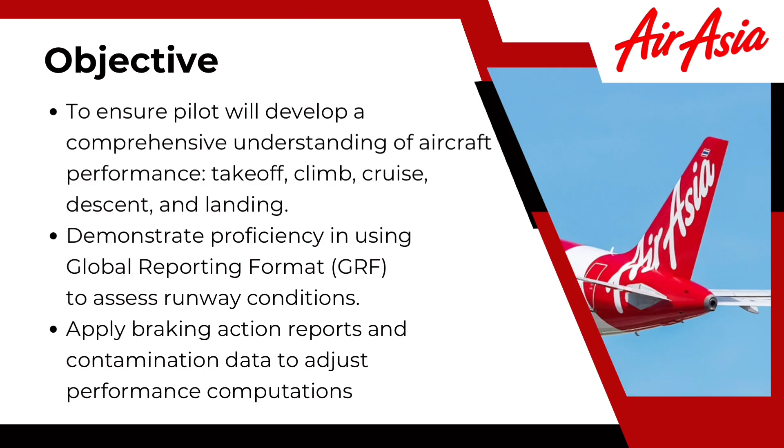Objective: to ensure the pilot develops a comprehensive understanding of aircraft performance - takeoff, climb, cruise, descent, and landing. Demonstrate proficiency in using the global reporting format to assess runway conditions, and apply braking action reports and contamination data to adjust performance computations.

Definition and purpose. Per Airbus, Getting to Grips with Aircraft Performance, Chapter 1: performance is the capability of an aircraft to safely achieve specific flight phases under defined conditions, meeting CS-25 and FAR-25 requirements. It is measured, demonstrated in flight tests, and recorded in the AFM.

Purpose in airline operations, per FCOM Intro: ensure safe operation within certified limits, optimize payload, range, and fuel efficiency, and provide accurate data for dispatch and in-flight decision-making.

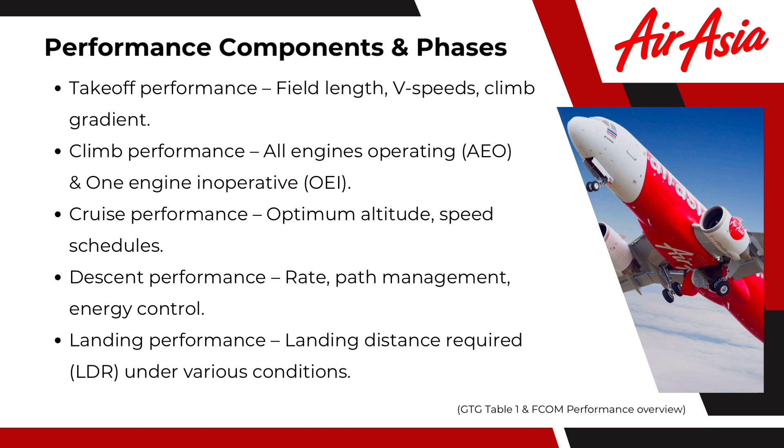Performance components and phases: takeoff performance covers field length, V-speeds, and climb gradient. Climb performance includes all engines operating (AEO) and one engine inoperative (OEI). Cruise performance covers optimum altitude and speed schedules. Descent performance involves rate, path management, and energy control. Landing performance covers landing distance required (LDR) under various conditions.

Factors affecting takeoff performance: aircraft weight. Increased takeoff or landing weight means longer field lengths and reduced climb gradient. Center of gravity also matters - a forward CG increases drag, while an aft CG reduces stability.

Environmental conditions: wind - headwind improves performance, tailwind degrades it. Temperature - high OAT reduces thrust and lift. Pressure altitude - high altitude reduces air density.

Regulatory framework, from Getting to Grips with Aircraft Performance, Chapter 3. The hierarchy: ICAO SARPS, Annex 6 and 14, set global standards. EASA/FAA provide certification and operational rules. CS-25/FAR-25 provide detailed performance requirements - certification versus operational.

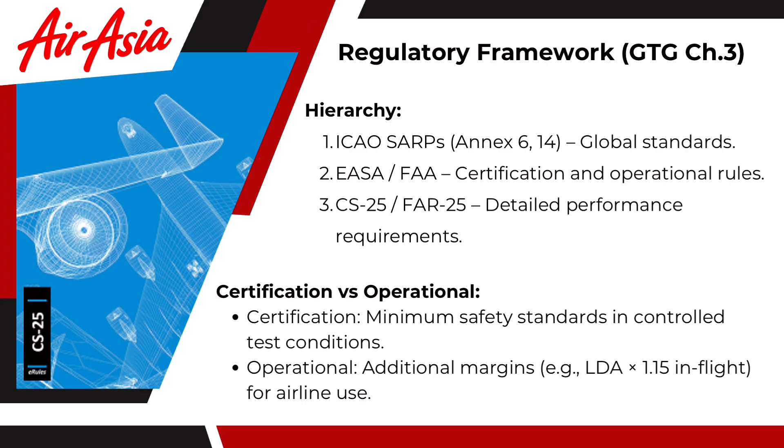Certification establishes minimum safety standards under controlled test conditions. Operational rules add additional margins - for example, LDA times 1.15 in flight for airline use. CS-25 versus FAR-25 share a common structure of limitations.

Takeoff performance requirements include climb gradient requirements for AEO and OEI, and en route OEI drift down. For landing performance, differences between standards are minor wording or procedural differences.

Airbus data meets both standards. Per Airbus documentation flow, GTG Chapter 4 and FCOM Intro: the AFM, Aircraft Flight Manual, is legally binding and contains certified data and limitations.

The FCOM, Flight Crew Operating Manual, is based on AFM data but adapted for operational use. It contains performance tables, QRH cross-references, and MEL/CDL adjustments.

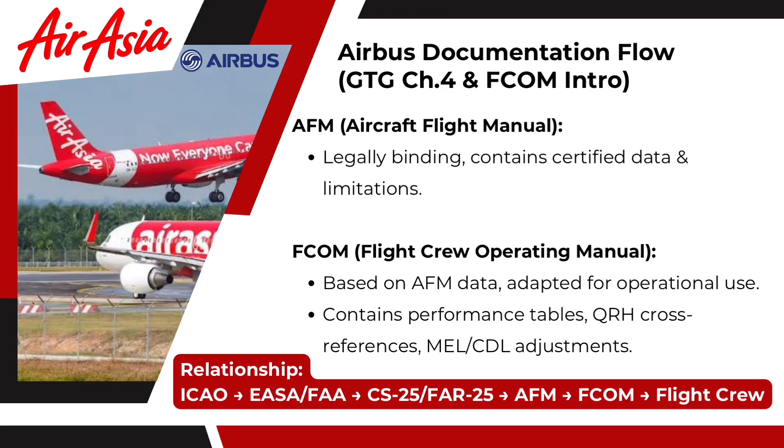The relationship flows: ICAO, through EASA, through FAA, through CS-25, through the AFM, through the FCOM, through to the flight crew.

Summary and key takeaways: performance knowledge is essential for safe, efficient, and compliant operations. Always consider weight, CG, and environment in performance calculations. The regulatory chain ensures data integrity from ICAO standards to cockpit tables. The AFM is the certified truth; the FCOM is the operational application. This foundation applies to all subsequent topics: takeoff, climb, cruise, descent, and landing.

Takeoff performance: scope and objectives. Purpose is to ensure safe airborne transition and required climb gradient compliance under given conditions. Regulatory basis: CS-25, FAR-25, covering accelerate-stop, accelerate-go, and obstacle clearance requirements.

Performance data sources: the AFM provides certified data, while the FCOM provides operational application for pilots. Flight phases covered include ground roll, rotation, liftoff, and climb segments.

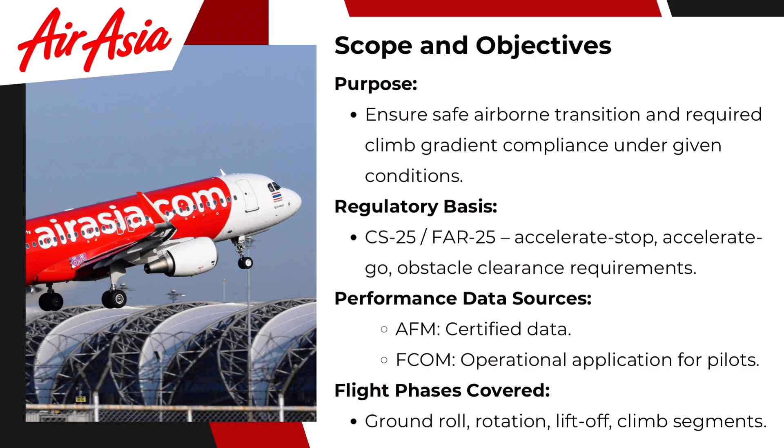Regulatory requirements: certification standards for takeoff. CS-25/FAR-25 key points include balanced field length determination, OEI climb gradient minima, and V-speed definitions and criteria, demonstrated with worn brakes for VMBE.

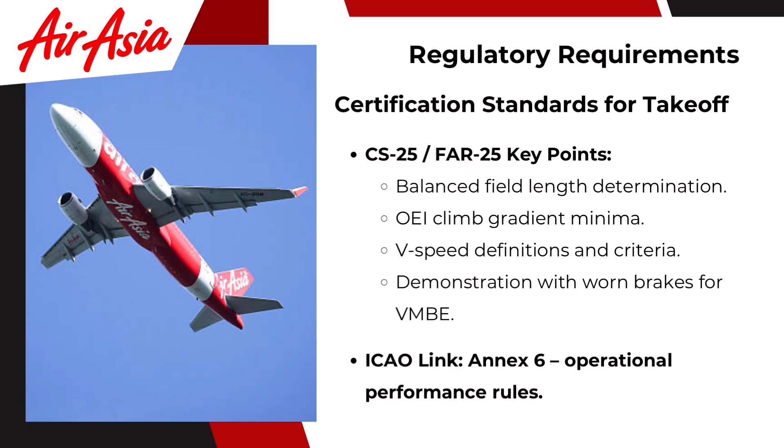ICAO link: Annex 6 covers operational performance rules. V-speeds include limiting speeds such as VS, VS1G, VSR, VMCG, VMCA, VMU, VMBE, and V-tire, as well as operating speeds like V1, VEF, VR, V liftoff, V2, F speed, S speed, green dot speed, VFE, VLE, and VLS.

Key V-speeds, part 1: essential speeds for takeoff. V1 is the decision speed to continue or abort the takeoff.

VR is the rotation speed, initiating nose-up pitch. V2 is the takeoff safety speed after engine failure. Calculation factors include weight, flap setting, and environmental conditions.

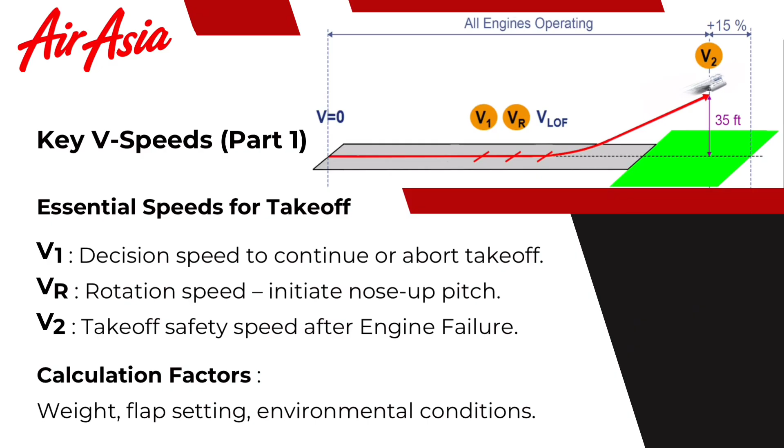Key V-speeds, part 2. VMBE is the maximum brake energy speed, reflecting braking capability in a rejected takeoff. VMU is the minimum unstick speed, the lowest safe liftoff speed without tail or wing strike.

VMCG is the minimum control speed on the ground with one engine inoperative. VMCA is the minimum control speed airborne, to maintain straight flight with one engine inoperative.

Key V-speeds, part 3. V-tire is the maximum tire speed - the tire manufacturer specifies the maximum ground speed in order to limit centrifugal forces and heat generation that may damage the tire structure. For example, for the A321 XLR aircraft, V-tire equals 235 miles per hour, published as 204 knots in Airbus documentation.

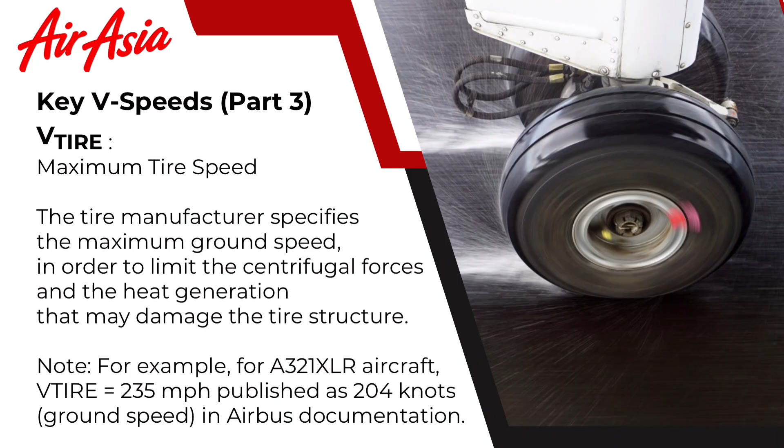Balanced field length: accelerate-stop versus accelerate-go. Accelerate-stop is the distance to reach V1 and stop safely. Accelerate-go is the distance to reach V1, lose an engine, and continue to liftoff.

Balanced field length occurs when both distances are equal, determining the maximum takeoff weight for given conditions. Impact factors include weight, thrust, and environmental conditions.

Factors affecting takeoff performance - primary influences: aircraft weight, where heavier means longer ground roll and reduced climb gradient; environmental factors like pressure altitude, temperature, and ISA deviation; wind, slope, and surface condition; and configuration, including flap/slat setting and thrust rating.

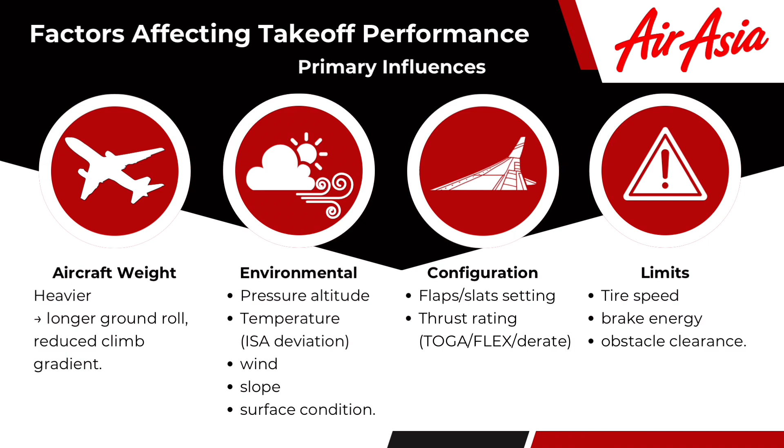TOGA, flex, or derate - flex and derate operations. Flex is an assumed temperature method of reducing thrust while meeting performance margins. Derate is a fixed lower thrust setting, and if installed, can combine with flex. Benefits include saving engine life, improving engine reliability, and reducing maintenance costs. Limitations: not allowed on contaminated runways, and must still meet OEI climb requirements.

Flexible takeoff uses a thrust level less than TOGA. Performance computation is done by adjusting the max takeoff thrust performance, using a single takeoff chart calculated for TOGA, with the possibility to recover TOGA at any moment. It is not allowed on contaminated runways and provides no performance improvement.

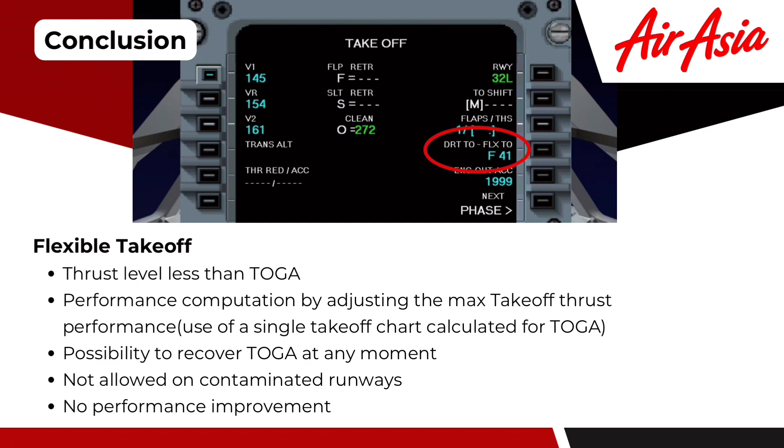Derated takeoff: a thrust level less than TOGA. A new set of performance data is provided in the flight manual for each derate level, and a specific takeoff chart is used for each derate level.

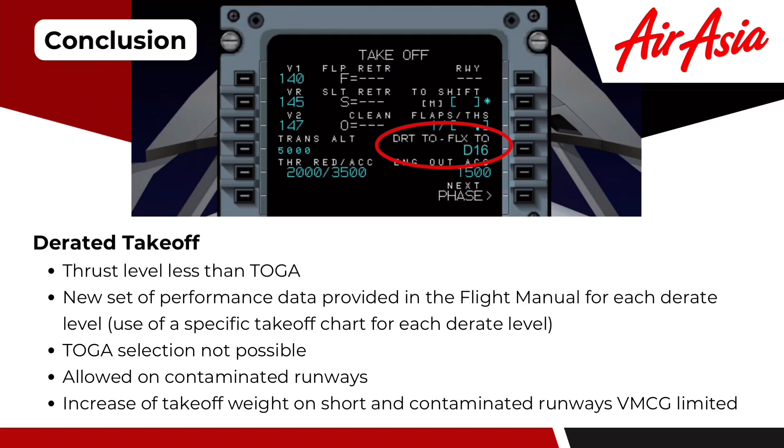TOGA selection is not possible with a derated takeoff, though it is allowed on contaminated runways, which can increase takeoff weight on short and contaminated runways that are VMCG limited.

Engine thrust limitation: 5-minute TOGA thrust with all engines operating, and 10-minute TOGA thrust with one engine inoperative.

There are two different goals during one engine inoperative versus all engines operating conditions. For one engine inoperative, the goal is safety, respecting official requirements.

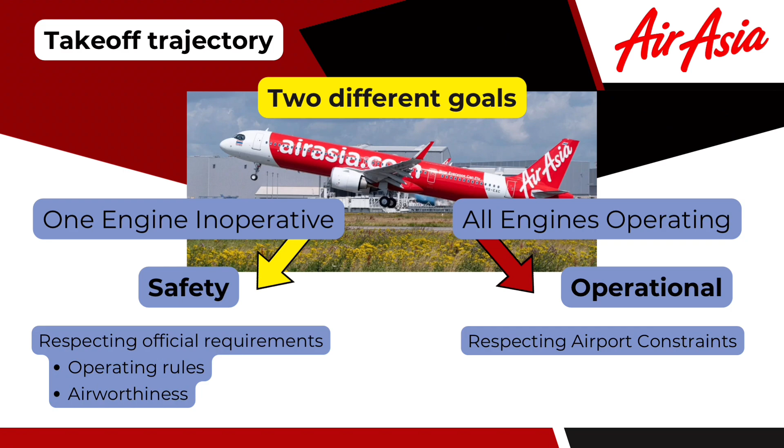One engine inoperative during takeoff: certification must demonstrate safe continuation after OEI at V1.

Takeoff segments: first segment, from liftoff to gear retraction. Second segment, gear up to acceleration altitude. Acceleration segment, accelerate to final climb speed. Final segment, climb to en route altitude.

Operational notes: adjust thrust, maintain control, and follow the SID or engine-out procedures.

Takeoff on wet runways: wet runway performance is defined as water less than 3 millimeters depth on greater than or equal to 25% of the surface. The impact is reduced acceleration and a longer takeoff roll.

Adjustments require using wet runway performance tables, and considering full thrust if margins are small. A headwind can partially offset the wet runway penalty.

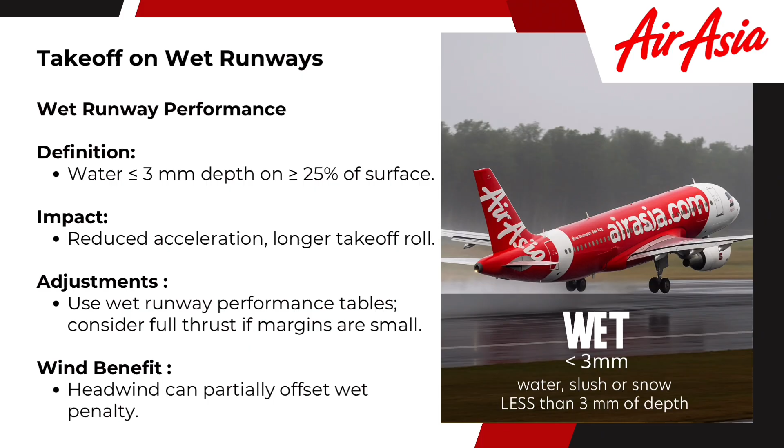Takeoff on contaminated runways: contaminated runway is defined as greater than 25% of surface covered by greater than 3 millimeters of water, slush, snow, or ice.

The impact is a significant acceleration reduction and longer takeoff distance. Operational actions include using TOGA thrust and applying specific contaminated runway data from the AFM or FCOM.

Review the OEI procedure for reduced directional control, and consider GRF or RCAM runway reports.

Takeoff using GRF: the Global Reporting Format was implemented globally from 4 November 2021 by ICAO as a standardized method of runway condition assessment and reporting.

It enhances communication between airport operators, ATC, and flight crews. The core output is the runway condition report with the RWYCC, or Runway Condition Code.

GRF objectives and benefits include a harmonized assessment for all airports, and it links observed runway conditions with performance data in aircraft manuals.

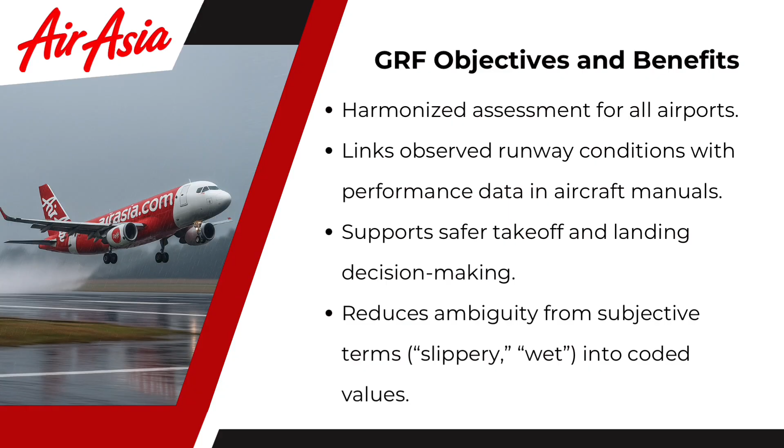The Runway Condition Report, or RCR, components include the aerodrome location indicator, date and time, and the runway designator.

It includes RWYCC for each third of the runway—touchdown, mid, rollout—along with a surface description, such as wet or compacted snow or ice, and the depth of contaminant, if applicable.

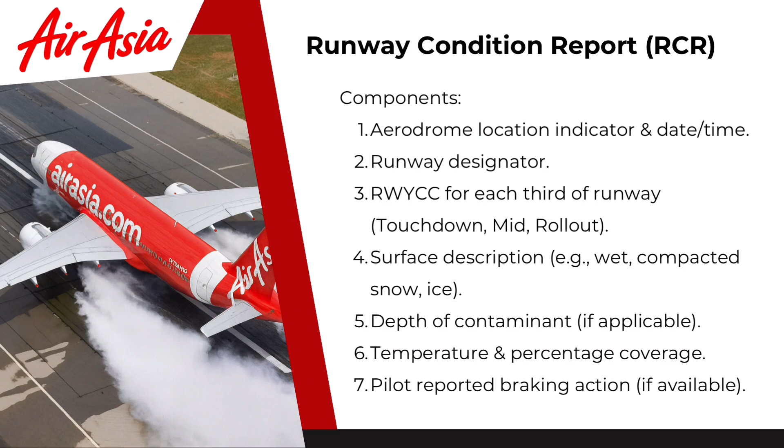It also includes temperature, percentage coverage, and pilot-reported braking action, if available.

Runway Condition Codes, or RWYCC, use a scale from 0 to 6.

6 is dry, 5 is good or wet up to 3 millimeters, 4 is good to medium, 3 is medium, 2 is medium to poor, 1 is poor, and 0 is nil, or no braking action.

RWYCC is derived from the RCAM table based on observed conditions. The Runway Condition Assessment Matrix, or RCAM, maps surface type, contaminant depth, and temperature to RWYCC.

Examples: dry is 6; wet with greater than 25% coverage and less than 3 millimeters is 5; slush or water greater than 3 millimeters at less than 3 degrees Celsius is 2 or 1.

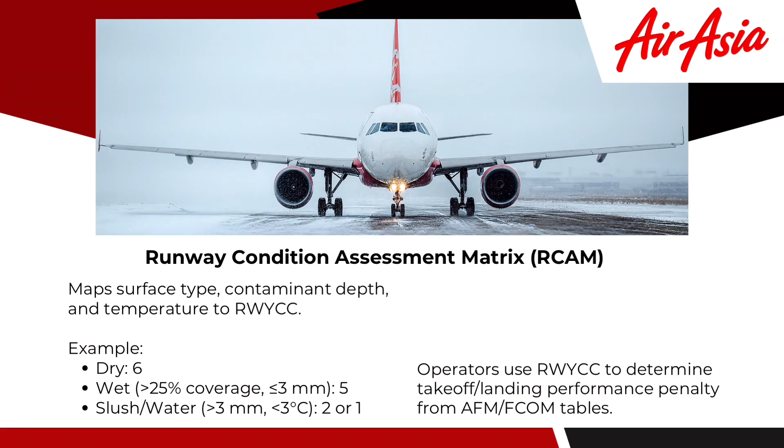Operators use RWYCC to determine the takeoff and landing performance penalty from AFM or FCOM tables.

Contaminated runway surface conditions: first, standing water—water more than 3 millimeters deep, including running water of this depth.

Second, dry snow—snow too dry to form a snowball, snow from which a snowball cannot readily be made.

Third, wet snow—snow that contains enough water content to make a well-compacted solid snowball, but water will not squeeze out.

Fourth, slush—snow that is so water-saturated that water will drain from it when a handful is picked up, or will splatter if stepped on forcefully.

Fifth, compacted snow—snow that has been compacted into a solid mass such that aeroplane tires at operating pressures and loadings will run on the surface without significant further compaction or rutting.

Sixth, frost—a thin layer of ice crystals formed when moisture freezes on a cold surface. Unlike solid ice, frost has a grainy texture, and it can make the runway slippery, reported as reduced braking action.

Seventh, ice—water that has frozen, or compacted snow that has transitioned into ice in cold and dry conditions.

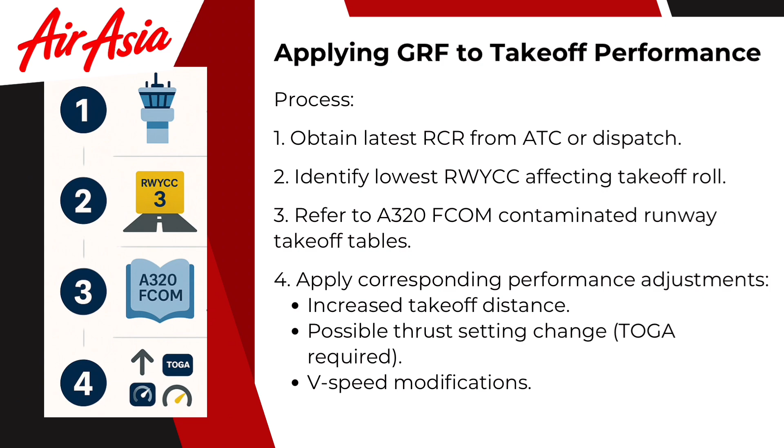Refer to the A320 FCOM contaminated runway takeoff tables and apply the corresponding performance adjustments, resulting in increased takeoff distance.

EFB wet and contaminated runway takeoff: open the EFB Performance Module and select the airport and runway.

Input the runway condition, RWYCC, contaminant type—wet, slush, snow, or ice—depth or coverage, then select the A320 variant and configuration, including flaps and anti-ice.

With a low RWYCC, the EFB may suggest TOGA. The EFB then calculates TODA, V-speeds, and maximum takeoff weight.

Cross-check with FCOM wet and contaminated tables, confirm values, set them in the FMGS, and monitor acceleration.

MEL-CDL considerations: MEL items, such as an inoperative anti-skid, may require a RWYCC downgrade or prohibit operations.

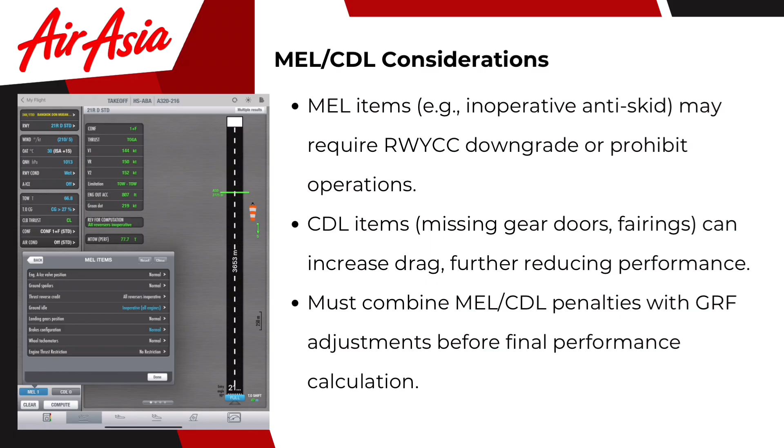CDL items, such as missing gear doors or fairings, can increase drag, further reducing performance. MEL-CDL penalties must be combined with GRF adjustments before the final performance calculation.

RWYCC adjustments and limitations: pilot reports can upgrade or downgrade the RWYCC based on actual braking action.

Temperature changes may improve or deteriorate surface friction rapidly. If there is significant contaminant clearance, the RWYCC should be reassessed.

Limitations. RWYCC applies to performance, not necessarily to controllability. Additional margin may be required. Takeoff may be prohibited at RWYCC 0 without mitigation.

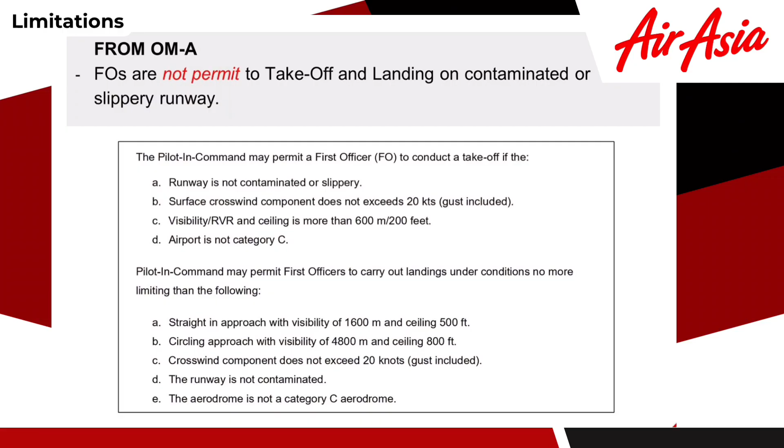Limitations, from Thai Air Asia OM Part A: the first officer is not permitted to take off and land on a contaminated or slippery runway.

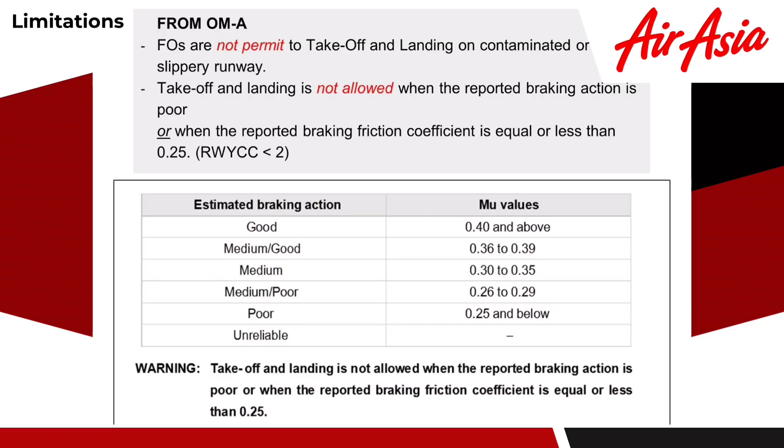Takeoff and landing are not allowed when the reported braking action is poor, or when the reported braking friction coefficient is equal to or less than 0.25, or RWYCC less than 2.

Climb performance overview. Purpose: ensures safe clearance from obstacles and efficient transition to cruise. Two main cases: all engines operating (AEO), with higher climb gradients used for normal operations; and one engine inoperative (OEI), with lower gradients, critical for regulatory compliance.

Governed by CS25/FAR25 certification standard: all engine operations versus one engine inoperative climb gradient. All engines operations climb gradient is normally well above the minimum required by regulations, limited by thrust setting, temperature, and weight.

One engine inoperative climb gradient is determined after engine failure at the critical point, and must meet the minimum regulatory gradient for obstacle clearance. Formula: rate of climb divided by ground speed, times 100.

Net versus gross climb gradient. Gross gradient is the flight test result under ideal conditions by test pilots. Net gradient is gross minus a safety margin to account for operational variability. For AEO, it's gross minus 0.8%; for OEI, gross minus 0.8 to 1.1% depending on segment. For regulatory use, obstacle clearance planning always uses net gradient.

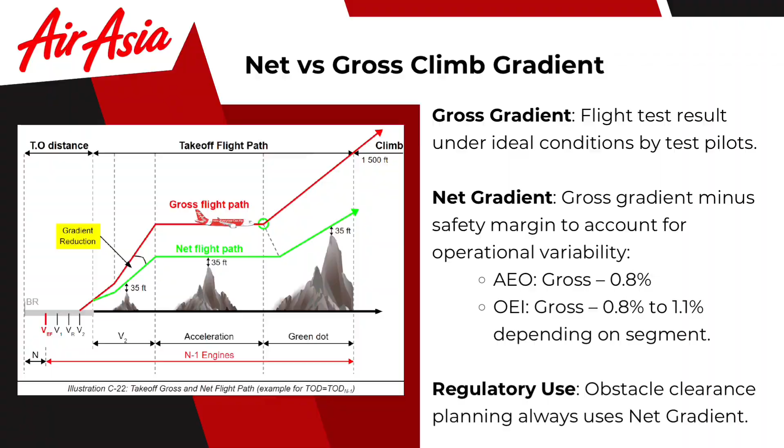Takeoff segments overview: there are 4 distinct segments in the OEI takeoff climb. First segment: liftoff to gear retraction. Second segment: gear up to acceleration altitude. Acceleration segment: level or low climb while accelerating to final climb speed. Final segment: steady climb to en route altitude.

Each segment has specific minimum gradient requirements. First segment, OEI: from liftoff to landing gear fully retracted. Characteristics: high drag due to gear down, low climb gradient. Requirement: a positive climb gradient is required.

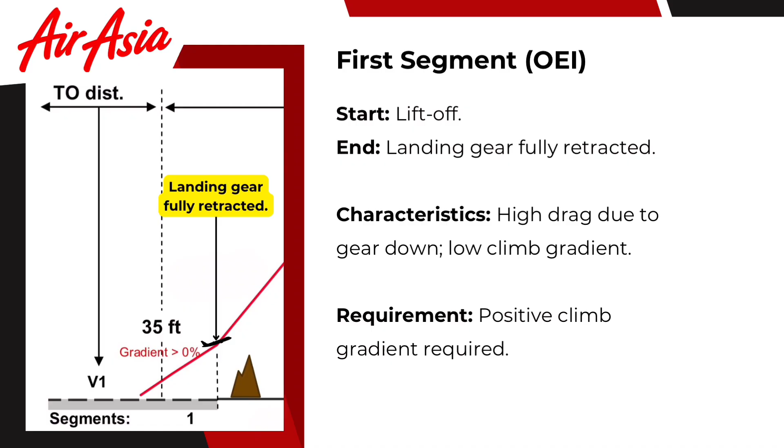Acceleration segment: at acceleration altitude after the second segment. Action: level off or shallow climb to accelerate to final takeoff climb speed. Requirement: no specific gradient, but must maintain obstacle clearance.

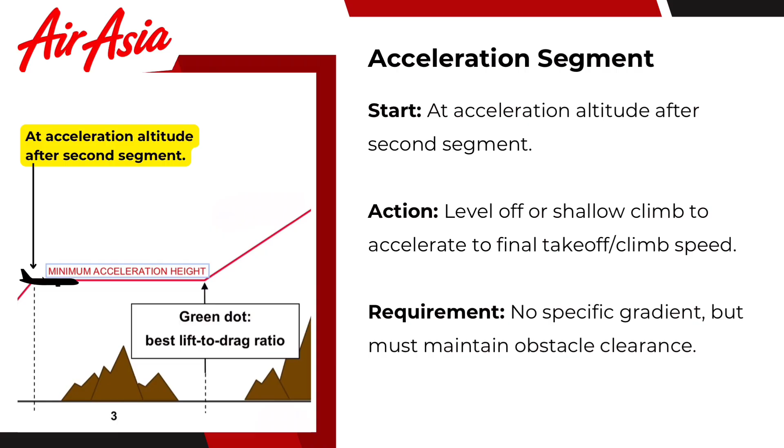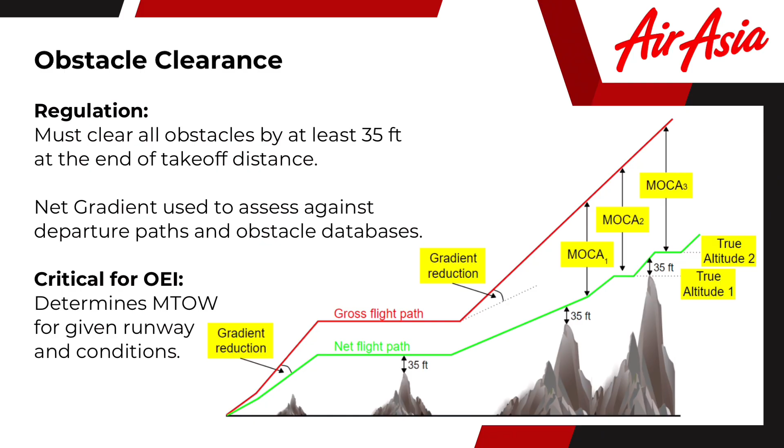Obstacle clearance regulation: must clear all obstacles by at least 35 feet at the end of takeoff distance. Net gradient is used to assess against departure paths and obstacle databases. Critical for OEI, it determines MTOW for a given runway and conditions.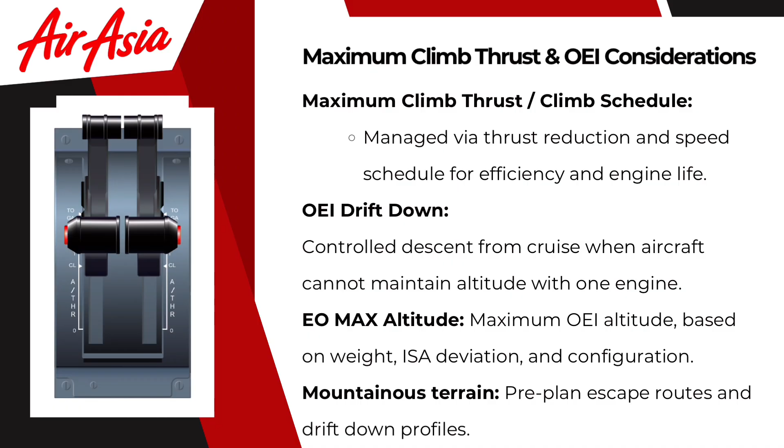Maximum climb thrust and OEI considerations. Maximum climb thrust, or climb schedule, is managed via thrust reduction and speed schedule for efficiency and engine life. OEI drift down is a controlled descent from cruise when the aircraft cannot maintain altitude with one engine. Engine out maximum altitude is the maximum OEI altitude based on weight, ISA deviation, and configuration. In mountainous terrain, pre-planned escape routes and drift down profiles are used.

Cruise performance overview. Purpose: achieve the most efficient fuel-time trade-off while maintaining operational constraints. Cruise types: Econ, long-range cruise (LRC), fixed Mach speed, max range. Balances cost index, winds, fuel, and ATC constraints.

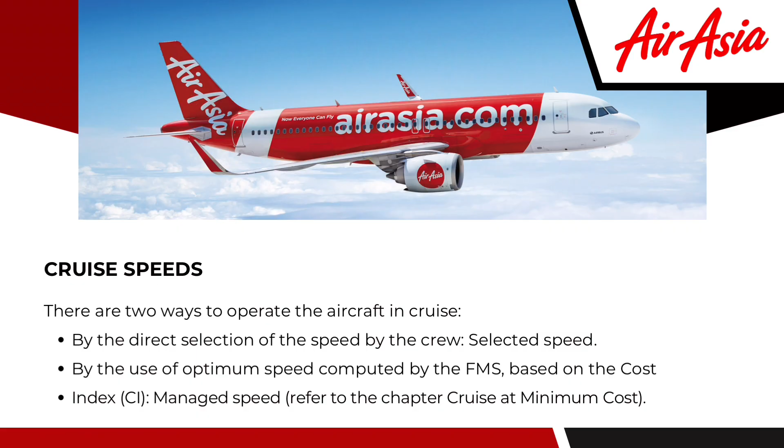Cruise speeds. There are two ways to operate the aircraft in cruise: by direct selection of the speed by the crew, called selected speed, or by the use of optimum speed computed by the FMS based on the cost index (CI), called managed speed. Refer to the chapter Cruise at Minimum Cost.

Managed speed: a flight guidance mode is managed when the FG manages the aircraft along the FMS flight plan, e.g. nav mode. A speed target is managed when the speed value is computed by the FMS, e.g. Econ.

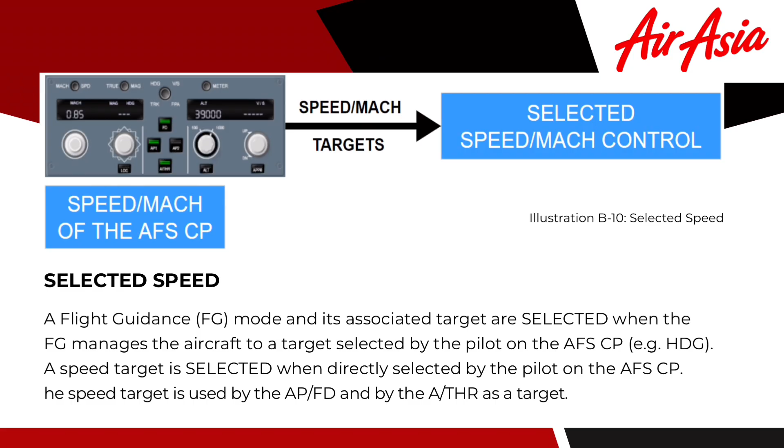The selected speed is a flight guidance mode, and its associated target is selected when the flight guidance manages the aircraft to a target selected by the pilot on the AFS-CP, for example heading. A speed target is selected when directly selected by the pilot on the AFS-CP. The speed target is used by the autopilot, FD, and auto thrust as a target.

Econ cruise definition: a speed-altitude combination optimized for cost index. Cost index balances time-related cost, crew, and maintenance, with fuel cost. Higher cost index means higher cruise speed, more fuel burn, less time. Lower cost index means lower speed, less fuel burn, more time.

Long-range cruise, or LRC, is the speed giving 99% of max range with slightly higher speed. It has slightly higher fuel burn than max range speed, but better operational flexibility. Used when schedule adherence is less critical and fuel economy is the priority.

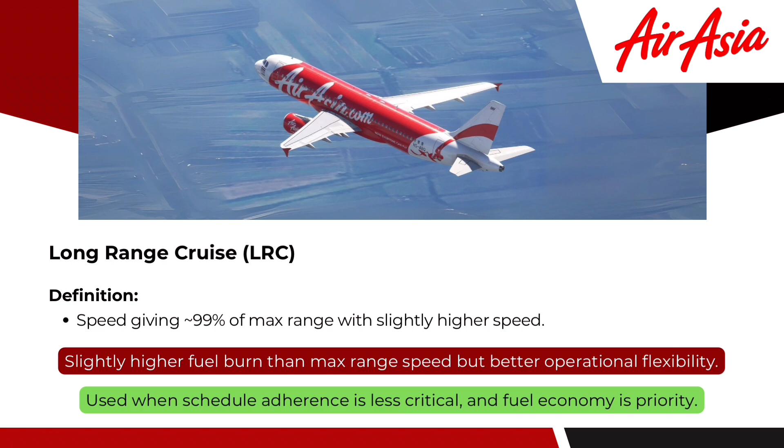Fixed Mach cruise, or speed, maintains a constant Mach number regardless of cost index optimization.

Common for ATC flow requirements or mixed fleet operations. Less efficient than econ long-range cruise when winds or temperatures vary.

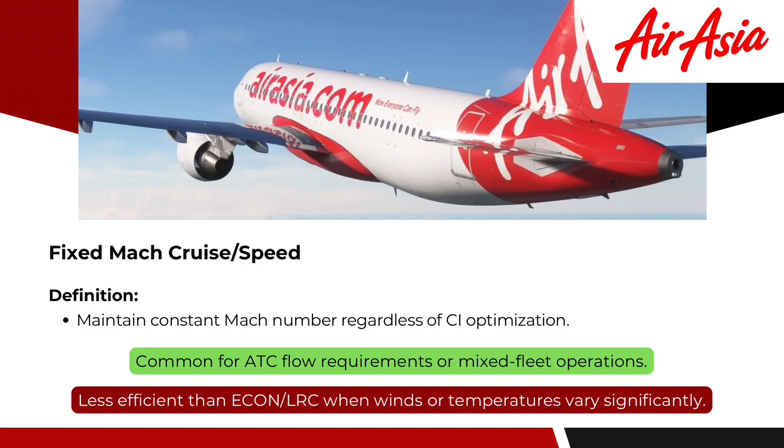Maximum range cruise definition: speed yielding absolute minimum fuel per distance. Typically slower than long-range cruise, rarely used in airline operations due to increased block time.

The soft altitude mode minimizes thrust variations. Two minutes after reaching the planned cruise altitude, soft altitude mode engages. This allows the aircraft to deviate plus or minus 50 feet in order to maintain the cruise Mach, thereby minimizing thrust variations and reducing fuel consumption.

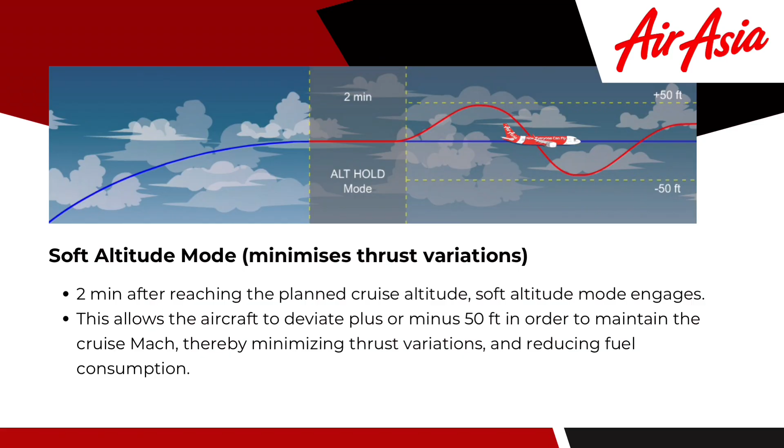Maximum recommended altitude, FMS computation. The maximum recommended altitude is the lowest of climb ceiling, maximum cruise altitude, maximum certified altitude, 1.3G buffet limited altitude.

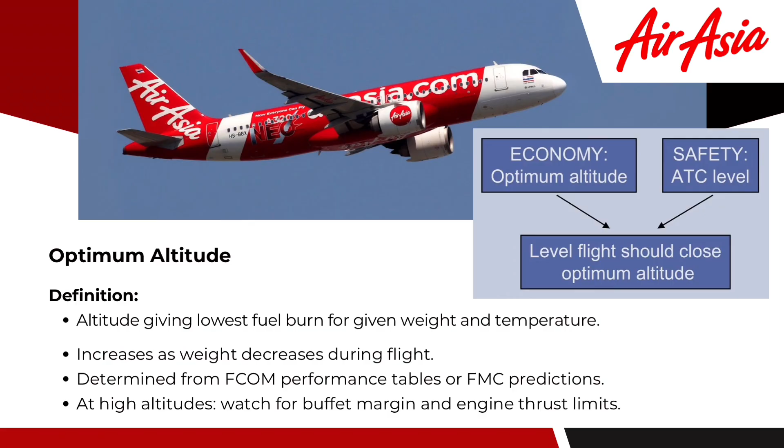Optimum altitude definition: altitude giving lowest fuel burn for given weight and temperature. Increases as weight decreases during flight. Determined from FCOM performance tables or FMC predictions. At high altitudes, watch for buffet margin and engine thrust limits.

Step climb procedures used to follow optimum altitude as weight reduces. FMC suggests step climbs, e.g. 2,000 feet increments, to stay near optimum altitude. Benefits: reduced fuel burn, increased range. Constraints: ATC clearance, terrain, and turbulence.

Wind effect on cruise. Headwind favors higher speeds to minimize exposure time. Tailwind favors slower speeds to maximize wind benefit. Wind component critical in cost index or econ calculations. Large wind gradients with altitude can change optimum altitude selection.

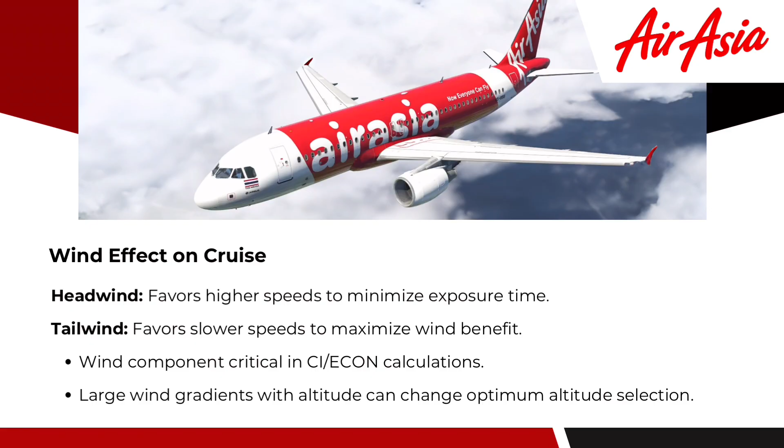Fuel burn implications: higher altitude, lower fuel flow, but reduced thrust margin. Speed selection affects drag profile, parasite drag versus induced drag. Step climbs and correct cost index settings can save significant fuel over long sectors. Fuel savings from cruise optimization often exceed takeoff and climb optimization gains.

Cruise performance limitations. Weight limits. Maximum cruise altitude constrained by thrust and buffet margins. Temperature: high ISA deviation reduces climb capability and may limit cruise altitude. Turbulence penetration may require lower Mach altitude.

ATC constraints can force suboptimal altitude speed. Engine out cruise: reduced altitude and speed, drift down profile applies.

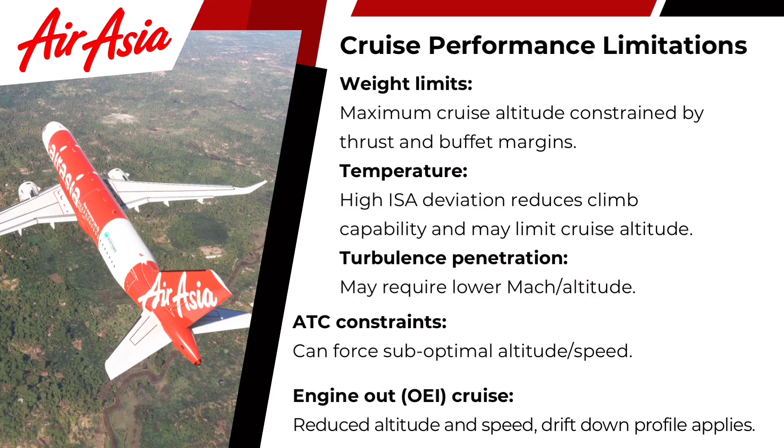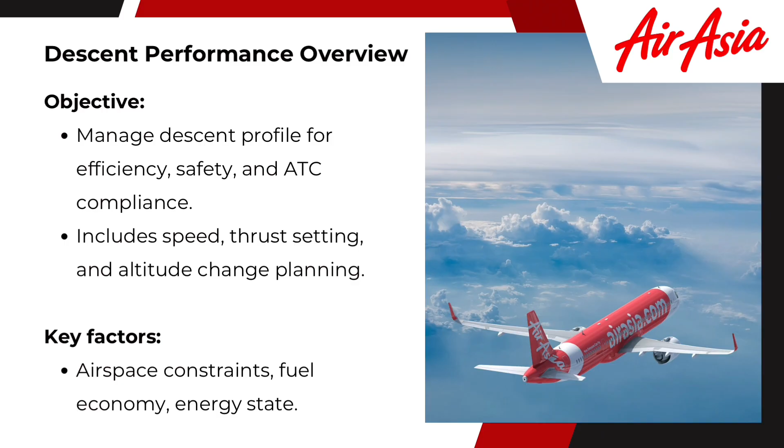Descent performance overview. Objective: manage descent profile for efficiency, safety, and ATC compliance. Includes speed, thrust setting, and altitude change planning. Key factors: airspace constraints, fuel economy, and energy state.

Types of descent. Normal descent: planned, managed descent using FMC, VNAV, and LNAV guidance. Idle descent, open descent: thrust levers at idle for most of descent maximizes fuel efficiency. Emergency descent: rapid altitude loss in response to pressurization or other emergencies.

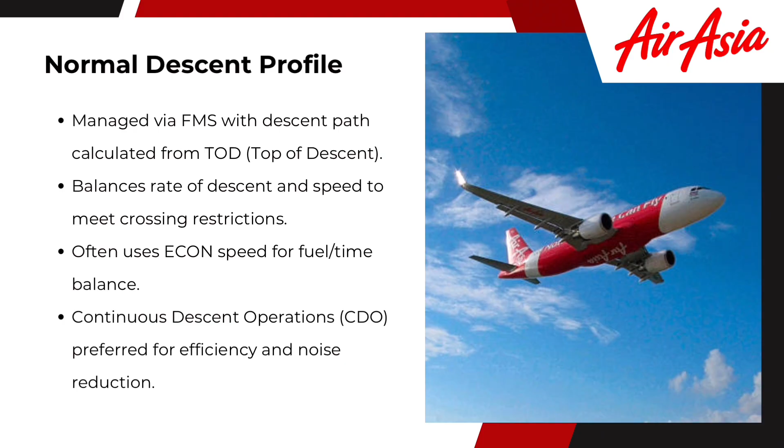Normal descent profile is managed via FMS with descent path calculated from top of descent. Balances rate of descent and speed to meet crossing restrictions. Often uses econ speed for fuel time balance. Continuous descent operations are preferred for efficiency and noise reduction.

Managed descent mode guides the aircraft along the FMS-computed vertical flight path. The DES mode is preferred when conditions permit since it ensures the management of altitude constraints and reduces the operating cost when flying at econ-des speed. The DES mode is only available when the aircraft flies on the FMS lateral flight plan, that is to say, when the aircraft uses the nav horizontal guidance mode.

Idle descent is managed via FMS with descent path calculated from top of descent, balances rate of descent and speed to meet crossing restrictions, often uses econ speed for fuel time balance, continuous descent operations preferred for efficiency and noise reduction.

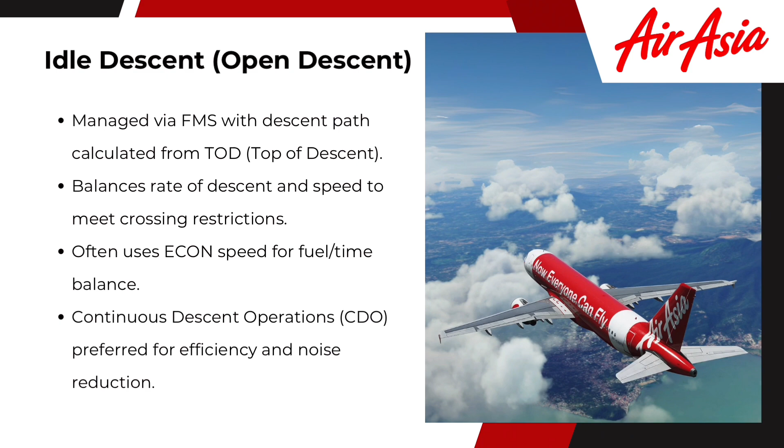Selected descent: open descent and vertical speed. In open descent mode, the AFS commands idle thrust and the elevators adjust the pitch to maintain the target speed, managed or selected. The open descent mode can be used to increase or reduce the descent slope. In open descent, the flight crew adjusts the target speed to modify the descent path.

More selected speed increase equals more descent slope increase.

Emergency descent: triggered by rapid depressurization, smoke, or other urgent threats. Goal: reach safe, breathable altitude, e.g., 10,000 feet, as quickly as possible. Typical profile: thrust idle, speed brakes full, descent rate greater than 6,000 feet per minute. Controlled to avoid overspeed and structural limits.

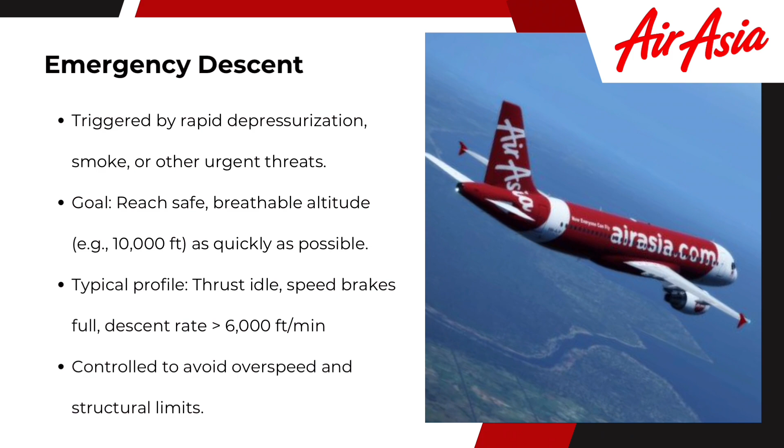Descent rate and angle. Descent rate, feet per minute, is controlled by pitch attitude and thrust. Descent angle is determined by energy state. Typical managed descent is 3 degrees. Steeper descents increase rate but require more drag or reduced speed. Wind affects ground track angle.

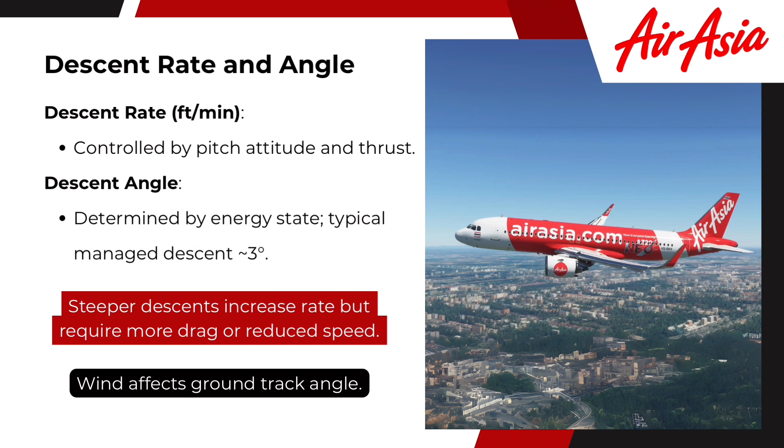Balance between potential energy, altitude, and kinetic energy, speed. Avoid excessive speed requiring speed brake use. Plan top of descent to minimize level-off segments. Early descent wastes potential energy. Late descent risks high rates and unstabilized approach.

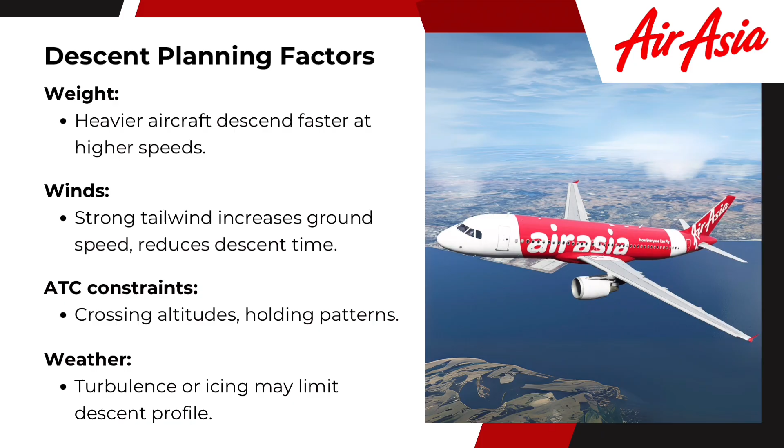Descent planning factors. Weight: heavier aircraft descend faster at higher speeds. Winds: strong tailwind increases ground speed, reduces descent time. ATC constraints: crossing altitudes, holding patterns. Weather: turbulence or icing may limit descent profile.

Impact of the wind on the descent path. The descent path computed by the FMS uses the forecasted wind entered in the descent wind page. However, in flight, actual conditions may vary from the predicted ones. As a consequence, the difference between the predicted descent wind and the actual wind, delta wind, affects the aircraft's behavior.

If the speed target is maintained, as in open descent mode, the aircraft tends to leave the FMS computed idle path. Holding performance considerations: holding consumes more fuel at lower altitudes due to higher thrust settings. Higher holds are more fuel efficient, but may not be possible due to ATC or weather.

Plan holding speeds, such as green dot, for fuel economy. Anticipate and load the holding pattern in the FMS for accurate fuel prediction.

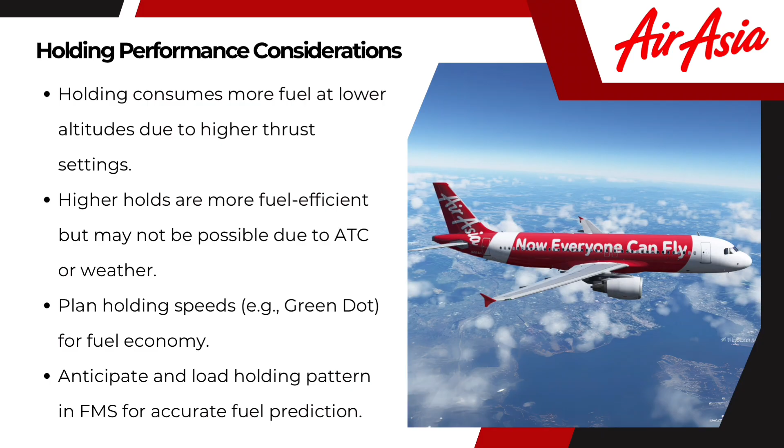Summary and best practices: use managed idle descent when possible for fuel and time efficiency. Monitor the descent profile early to avoid last-minute adjustments. Keep ATC informed for profile optimization. Emergency descent procedures must be memorized and practiced. Efficient descent planning saves more fuel over time than small climb improvements.

Landing performance overview. Landing performance is critical for safe runway operations, determined by aircraft speed, weight, configuration, environmental factors, and runway condition.

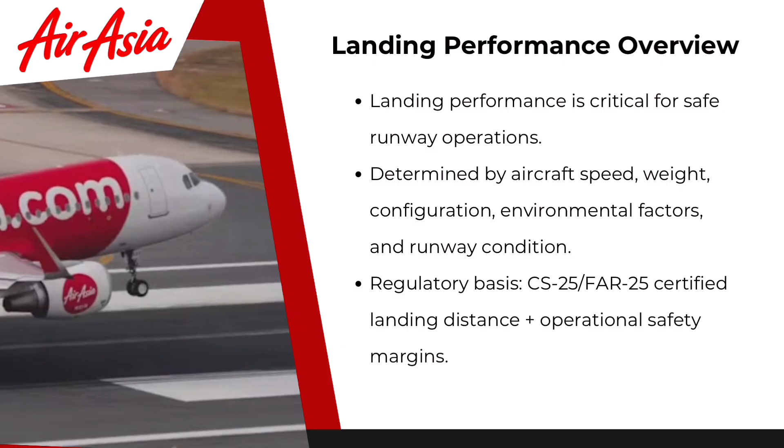Regulatory basis: CS 25, FAR 25, certified landing distance plus operational safety margins.

Limiting speed, VMCL, minimum control speed for landing. Determination of VMCL: most critical configuration for approach and landing, aircraft trimmed for AEO approach and landing, most unfavorable center of gravity, most unfavorable weight, speeds should be independent from weight. The control of the aircraft must not require exceptional piloting skill, alertness, or strength. Rudder force under 150 pounds, no excessive lateral control force.

Key speeds in landing. Operating speed VLS: lowest selectable speed, config 3 or config full. During flight phases, pilots should not select a speed below VLS.

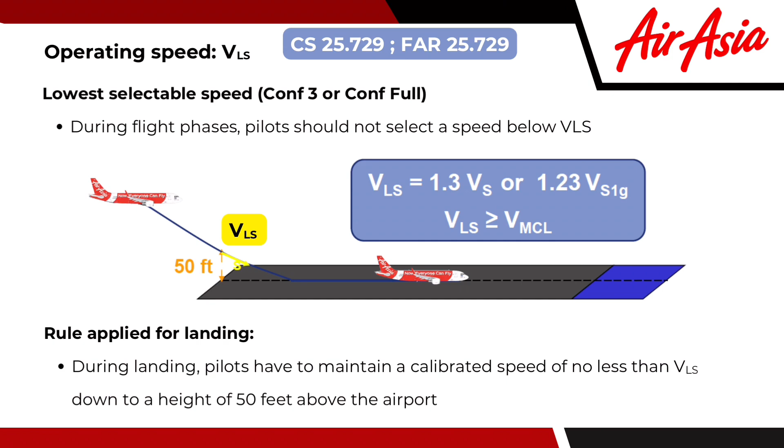Rule applied for landing: during landing, pilots have to maintain a calibrated speed of no less than VLS down to a height of 50 feet above the airport.

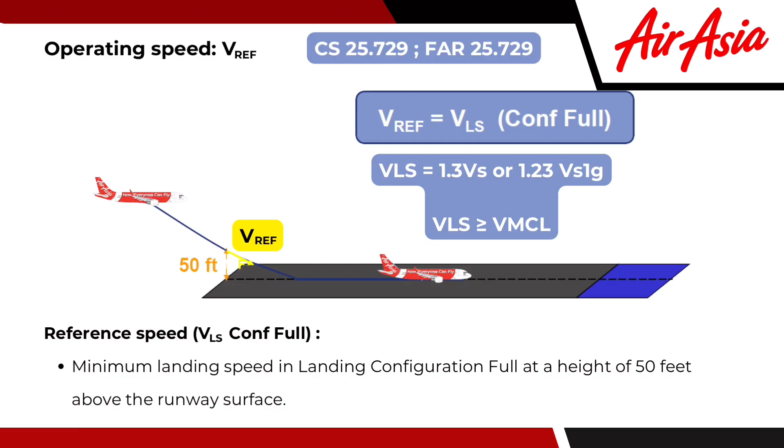Operating speed VREF, reference speed, VLS config full: minimum landing speed in landing configuration full at a height of 50 feet above the runway surface.

Operating speed V approach, final approach speed. During the approach phase, flaps and slats are in landing configuration, landing gears are extended. V approach is greater than or equal to VLS.

Correction with headwind, autothrust use, and/or ice accretion to become V approach.

Operating speed V approach, final approach speed: the FMGS managed speed is used to define the V approach target. It gives efficient guidance in windy conditions. V approach target equals ground speed mini plus actual headwind. Ground speed mini equals V approach minus tower wind. Actual wind is measured by ADIRS, and the tower wind is entered on the MCDU.

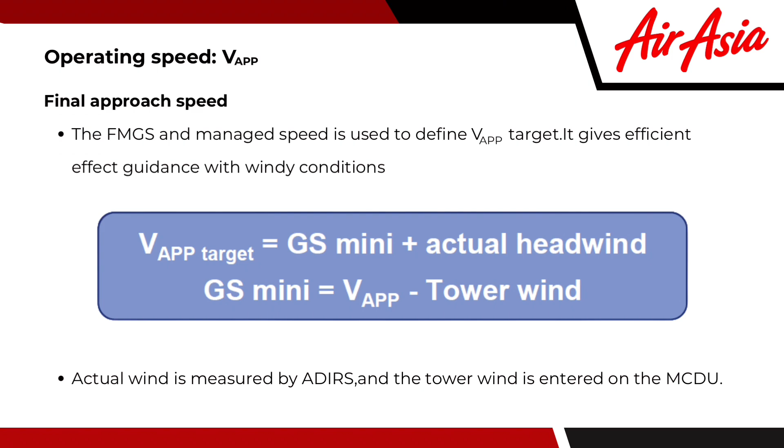Operating speed V approach example: VLS equals 130 knots, auto thrust on, tower wind equals 20 knots. V approach equals 130 plus corrections, maximum one-third of tower wind. V approach equals 137 knots. Ground speed mini equals V approach minus tower wind, which equals 117 knots.

Operating speed: green dot speed is the best lift-to-drag ratio speed in the clean configuration. VLS is the lowest selectable speed and provides an appropriate margin to the stall speed. The autopilot will not go below this speed if autothrust is active.

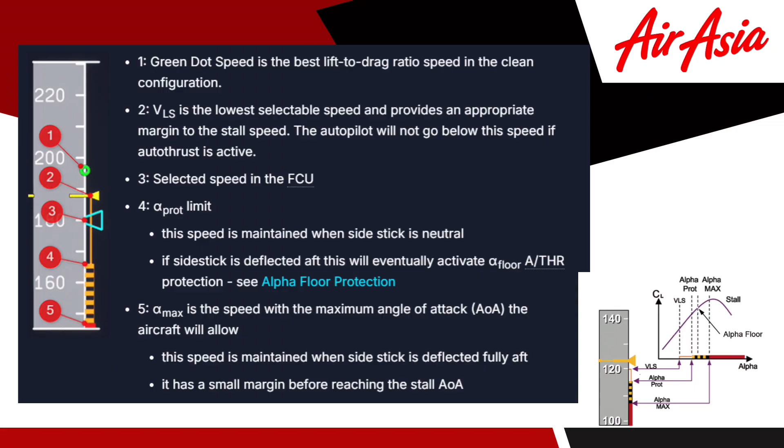Selected speed in the FCU. Alpha prot limit: this speed is maintained when the side stick is neutral. If the side stick is deflected aft, this will eventually activate alpha floor auto thrust protection. Alpha max is the speed with the maximum angle of attack the aircraft will allow. This speed is maintained when side stick is deflected fully aft, and it has a small margin before reaching the stall AOA. Performance factors, aircraft weight: maximum landing weight limits structural loads on landing gear and brakes.

Heavier weight means higher V approach and longer landing distance. Dispatch planning must ensure landing weight is within maximum landing weight for destination and alternate.

Performance factors, configuration: flaps and slats. Full landing configuration reduces V approach and landing distance. Partial flap landings require higher speed, which leads to longer distance. Spoilers and auto brake selection affect stopping capability.

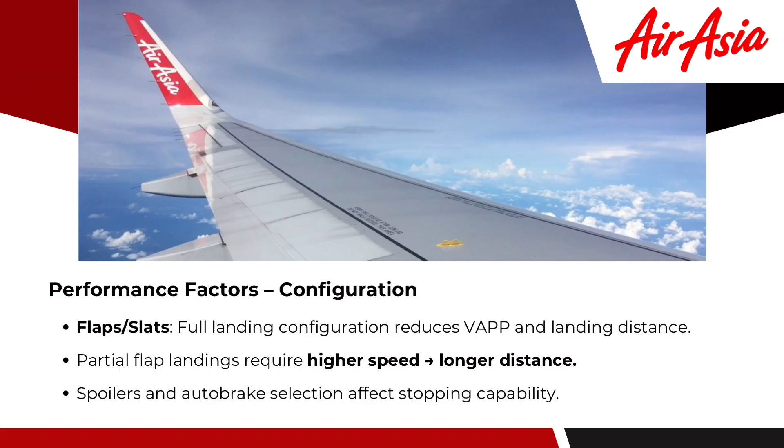Go-around requirements: certified go-around gradients, operational requirements, factors of influence. Engine thrust limitation: 5-minute TOGA thrust with all engines operating (AEO), 10-minute TOGA thrust with one engine inoperative (OEI).

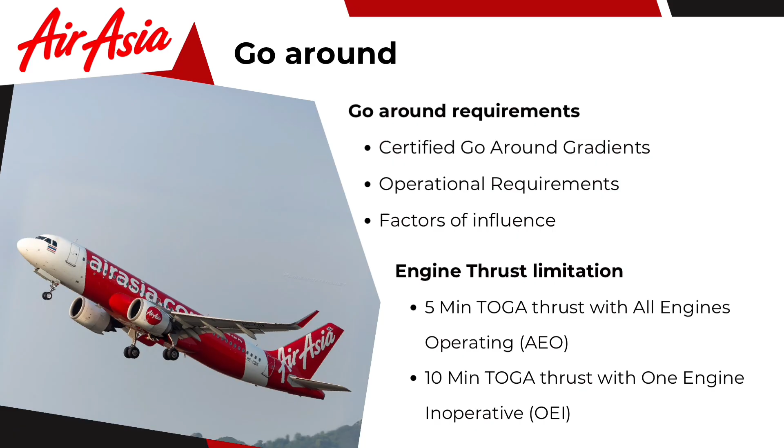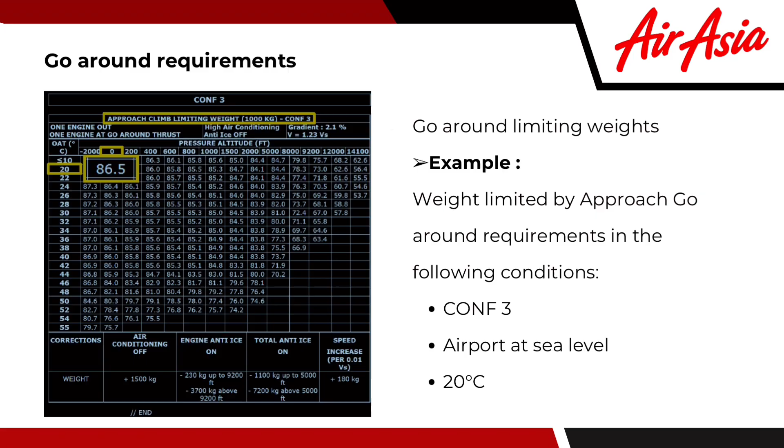Go-around requirements: approach climb gradient limitation. Go-around limiting weights. Example: weight limited by approach go-around requirements in the following conditions: config 3, airport at sea level, 20 degrees Celsius. Go-around requirements: landing climb gradient limitation.

Minimum gradient 3.2%.

Go-around requirements and go-around limiting weights. The approach climb gradient requirements imply restrictions for landing weight. Tables of go-around limiting weights are found in the FCOM.

Go-around limiting weights: the landing climb gradient requirement is less limiting than the approach climb gradient requirement. A table of landing climb limiting weights is not provided in operational documentation.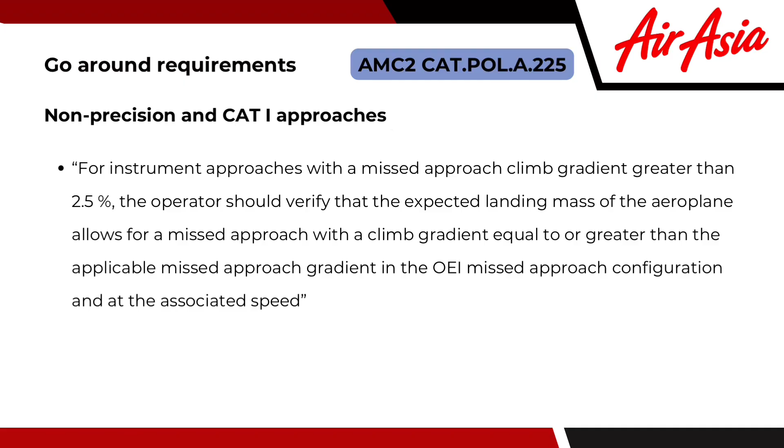Missed approach with one engine inoperative, for non-precision and Cat 1 approaches: for instrument approaches with a missed approach climb gradient greater than 2.5%, the operator should verify that the expected landing mass of the aeroplane allows for a missed approach with a climb gradient equal to or greater than the applicable missed approach gradient in the OEI missed approach configuration and at the associated speed.

For Cat 2 or Cat 3 approaches with DH below 200 feet, the operator should verify that the expected landing mass of the aeroplane allows a missed approach gradient of climb with the critical engine failed, using the speed and configuration for missed approach, of at least 2.5%, or the published gradient, whichever is greater. The gradient is 2.5% or more if the approach charts require a higher value for obstacle consideration.

What does the published missed approach gradient correspond to? PANS-OPS, ICAO Doc 8168, sets standards and recommendations for constructing missed approach procedures. PANS-OPS assumes normal operations, i.e., all engines operative.

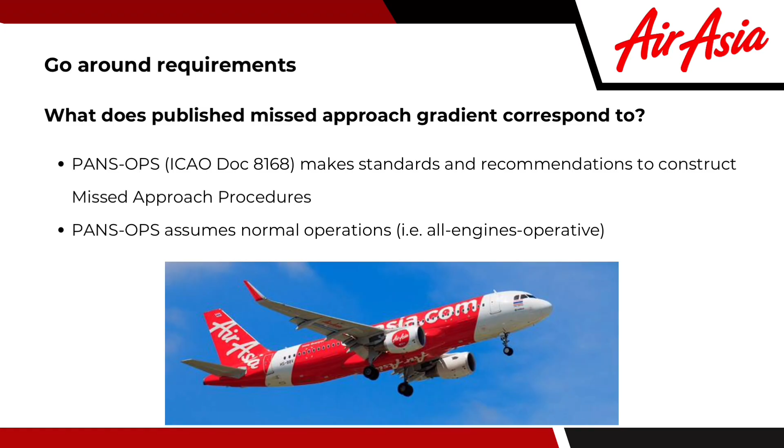Go-around requirements, first segment OEI. Missed approach procedures shall be established for each instrument approach. They shall specify a point where the procedure begins and a point where it ends, and shall terminate at an altitude or height sufficient to permit initiation of another approach, return to a designated holding pattern, or resumption of en route flight.

The procedure must ensure acceptable clearance above obstacles during the go-around phase, and must account for ATC constraints and airspace restrictions.

Go-around requirements, PANS-OPS: missed approach procedure design is initiated at the decision altitude/decision height in a precision approach, or at the missed approach point in a non-precision approach.

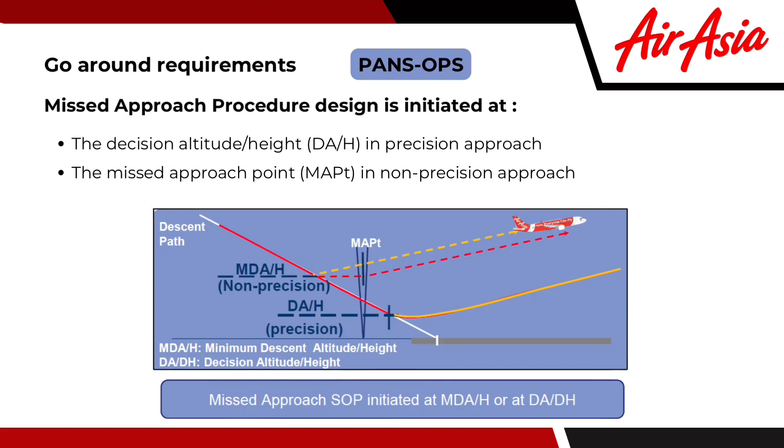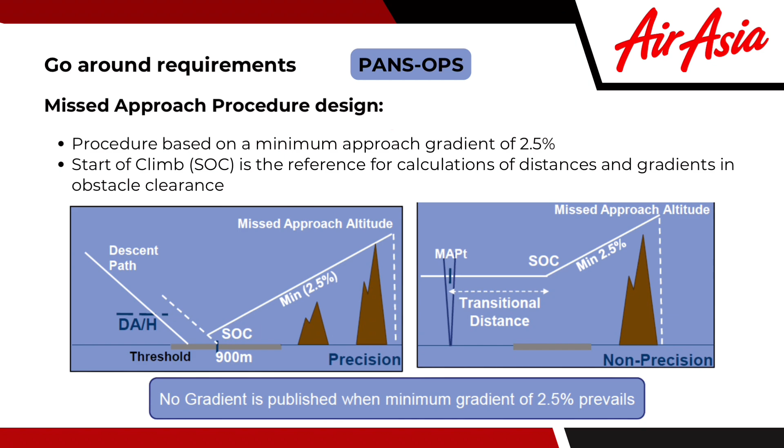Go-around requirements, PANS-OPS, missed approach procedure design: the procedure is based on a minimum approach gradient of 2.5%. Start of climb, or SOC, is the reference for calculations of distances and gradients in obstacle clearance.

Go-around requirements, PANS-OPS, missed approach gradient: the start of climb, SOC, is not published. The aircraft must clear the published gradient from the point where the aircraft has a positive climb gradient to the MAA.

Go-around requirements, PANS-OPS, missed approach protection area: depends on the type of departure, straight or turning; depends on the type of approach; and depends on the navigational aids used.

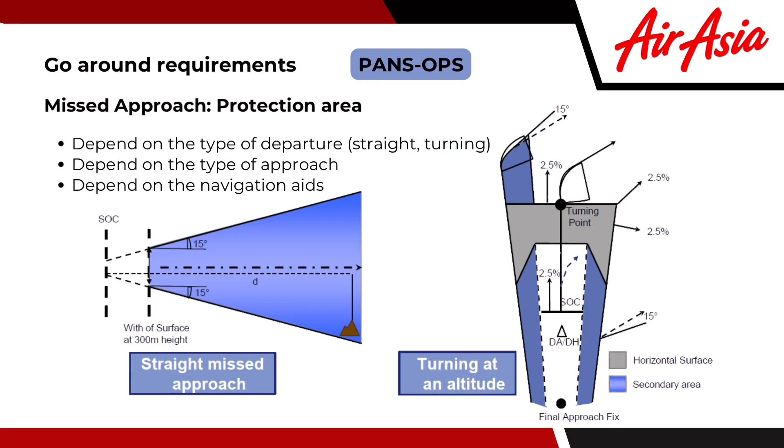Go-around requirements: landing weight may be limited due to green dot being reached before 10 min TOGA, and/or a very high missed approach altitude or gradient, requiring the crew to accelerate at an intermediate altitude.

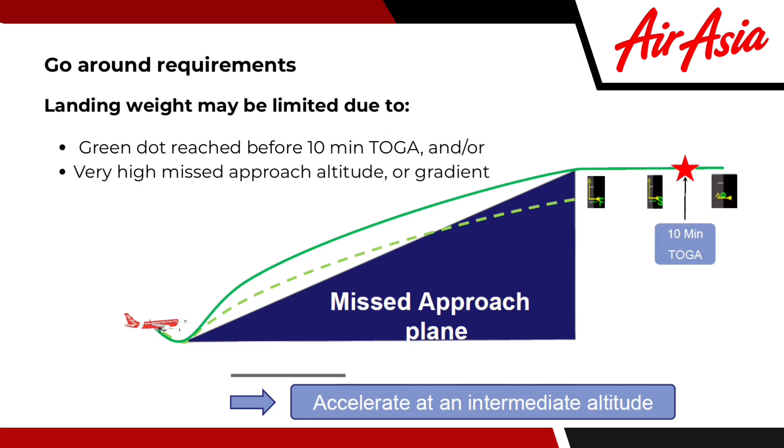Go-around requirements, required landing distance, dry: based on performance charts for a dry runway, maximum landing weight, and standard conditions.

Under CS25/FAR25, the certified distance is multiplied by an operational factor, typically times 1.67 for dry conditions, and adjusted for headwind, tailwind, slope, and temperature. This gives the dispatch versus in-flight landing distance.

Dispatch is the pre-flight calculation using regulatory safety factors. In-flight is updated using actual landing weight, weather, and runway conditions. In-flight data from the FMS or QRH often allows a lower safety factor, for example times 1.15 for dry conditions.

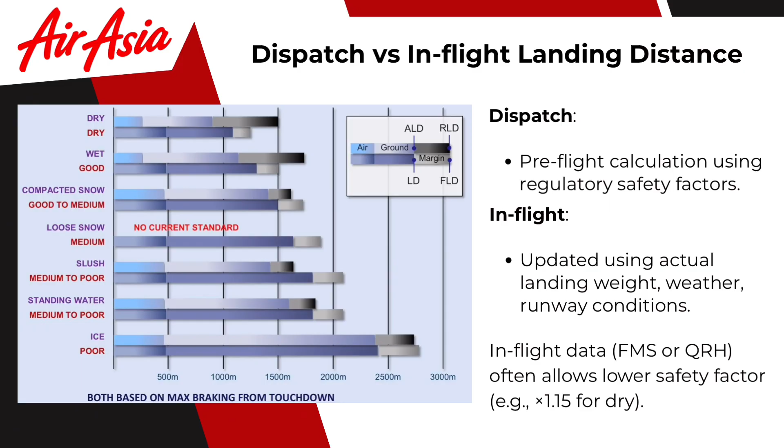System failures and their performance impact: brake failure reduces deceleration and may exceed available runway length. Thrust reverser inoperative increases stopping distance, especially on a contaminated runway. Anti-skid failure reduces braking efficiency and directional control.

Landing distance cross-check: compare the FMS-predicted landing distance with the QRH or Performance App result, and verify it against the runway available length and condition codes. This is essential before committing to the approach, especially in marginal conditions.

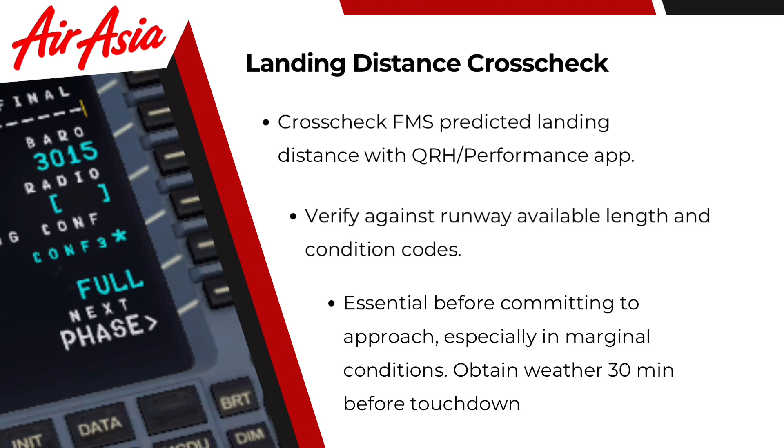Obtain weather information 30 minutes before touchdown. Summary best practice: monitor actual landing distance capability before the approach.

Select landing configuration and auto brake setting to match the runway length and surface. Factor in wind, slope, contamination, and any failures. Always perform an independent cross-check before landing commitment.

Landing performance using GRF: the purpose of GRF in landing performance is to apply the runway surface condition code, RWYCC, to adjust landing performance, using consistent data from ATIS, PIREP, or RCR to calculate the landing distance required, LDR, ensuring safe stopping within the available runway length.

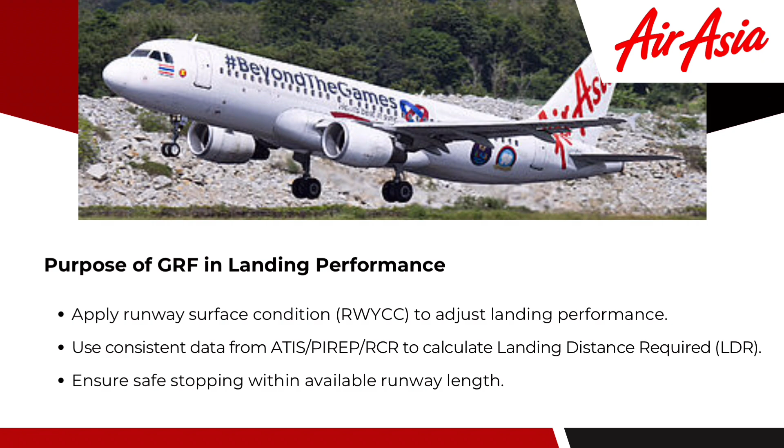Braking action reports with a landing focus: PIREPs report good, medium, poor, or nil, specific to landing rollout. ATIS broadcasts the RWYCC and surface description. Cross-check ATIS and PIREP before committing to the approach.

RWYCC downgrade or upgrade in a landing context: downgrade if braking is less effective than the RWYCC suggests; upgrade only with strong supporting evidence and friction data. This has a direct impact on LDR and landing configuration selection.

Airbus RCAM landing application: the Airbus Performance App/QRH integrates RWYCC into LDR tables, with inputs of RWYCC, slope, wind, weight, flap setting, and auto brake/reverser status, outputting the LDR adjusted for contamination.

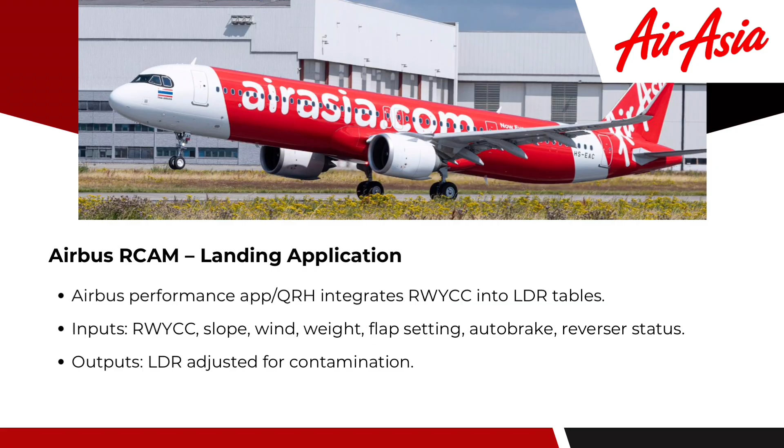Landing distance factors, or LDFs: dry is times 1.15 in flight, wet is times 1.92 for dispatch typically, and for contaminated runways the RWYCC and contamination-specific factor from RCAM is applied after the base dry performance from the FCOM.

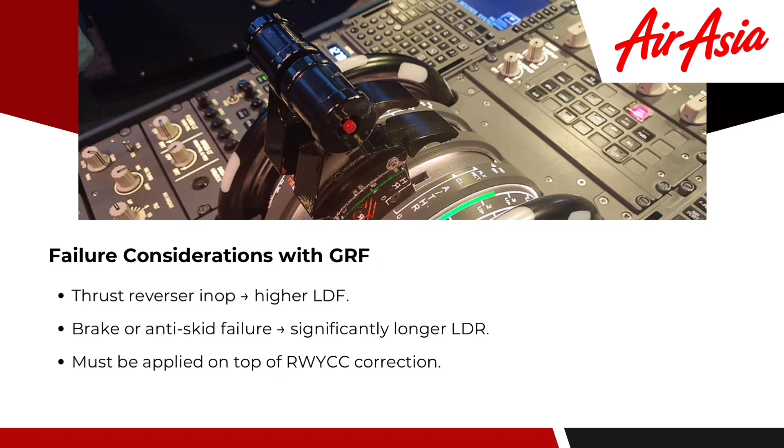Failure considerations with GRF: thrust reverser inoperative requires a higher LDF. Brake or anti-skid failure results in a significantly longer LDR. These must be applied on top of the RWYCC correction.

Cross-check procedures: compare the FMS LDR with the QRH or Performance App result, adjust for runway slope, wind, and MEL/CDL items, and abort the approach if the calculated LDR exceeds the runway available.

Crew best practices for landing on contaminated runways: use maximum reverse thrust when safe, choose a higher flap setting for a lower approach speed, and ensure the auto brake setting matches the required deceleration.

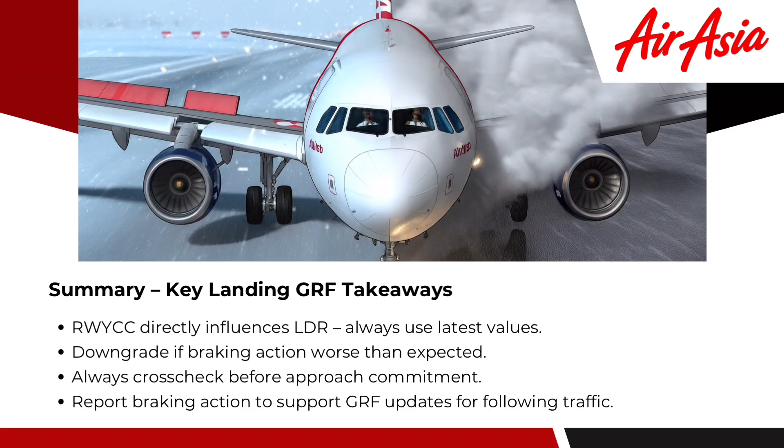Summary, key landing GRF takeaways: RWYCC directly influences LDR, so always use the latest values. Downgrade if braking action is worse than expected, always cross-check before approach commitment, and report braking action to support GRF updates for following traffic.